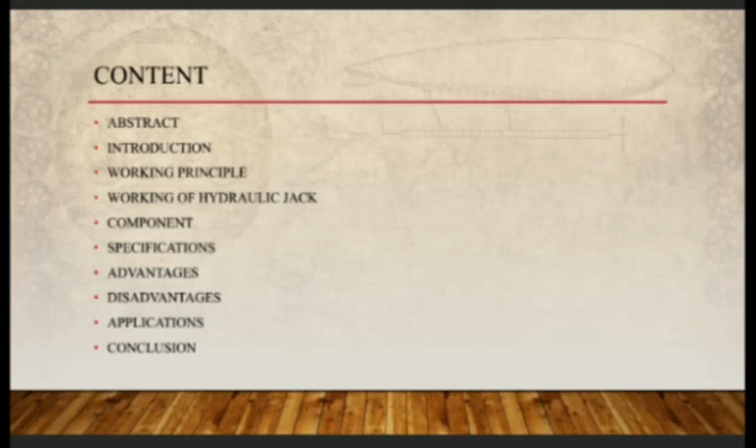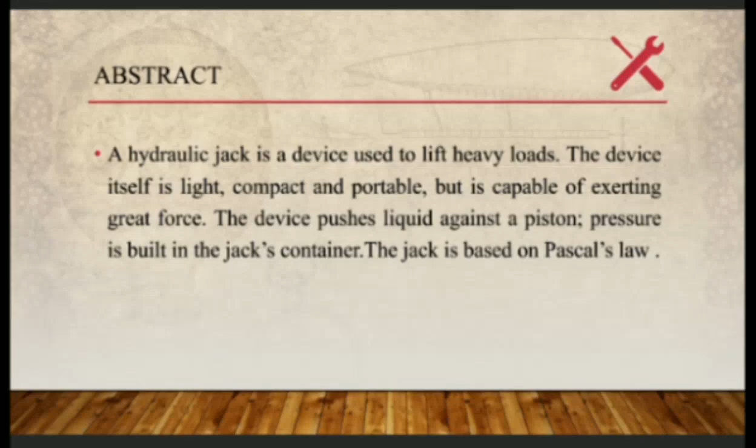Now let us take a look at the abstract. A hydraulic jack is a device used to lift heavy loads. The device itself is light, compact, and portable. This device works on the principle of Pascal's law. The device pushes liquid against a piston, and pressure is built in the jack container, where the pressure is the same throughout.

Introduction to hydraulic jack: a hydraulic jack is a jack that uses a liquid to push against a piston, based on Pascal's law. Pascal's law states that the pressure in a closed container is the same at all points. If two cylinders are connected, applying force to the smaller cylinder results in the same amount of pressure in the larger cylinder. Since the larger cylinder has more area, the resulting force will be greater, but the pressure will be the same. In other words, an increase in area leads to an increase in force. The greater the difference in size between the two cylinders, the greater the increase in force will be.

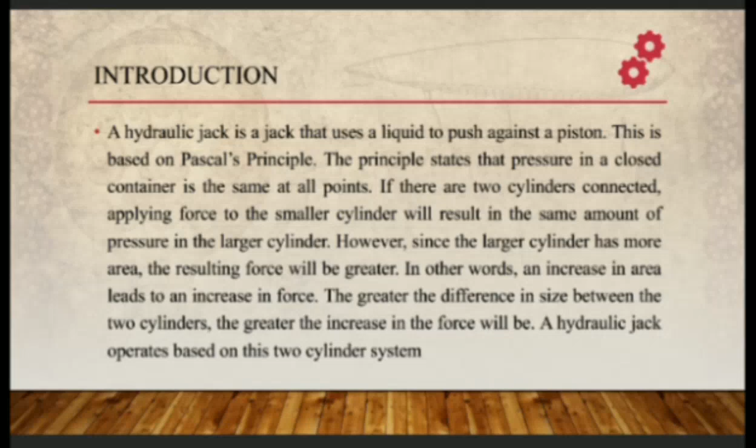A hydraulic jack operates based on this two-cylinder system.

Let's move forward to the basic working principle of the hydraulic jack. The wrench moves upward to drive the small piston upward to lift the weight. The oil pressure produced manually is squeezed into the large piston according to Pascal's principle. The area ratio of the bigger piston to the smaller piston is the same as that of the pressure.

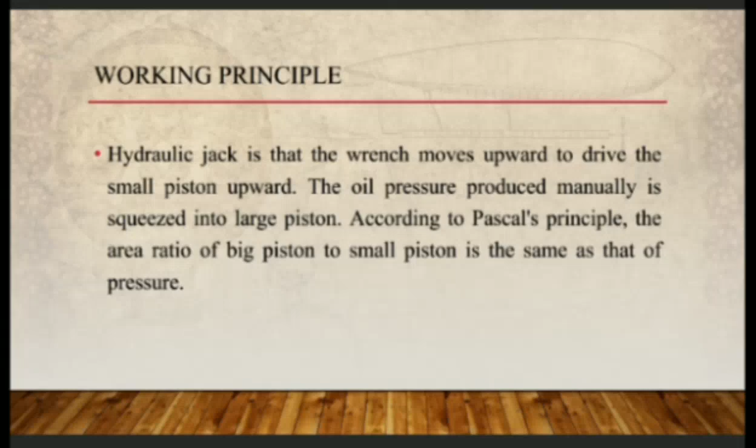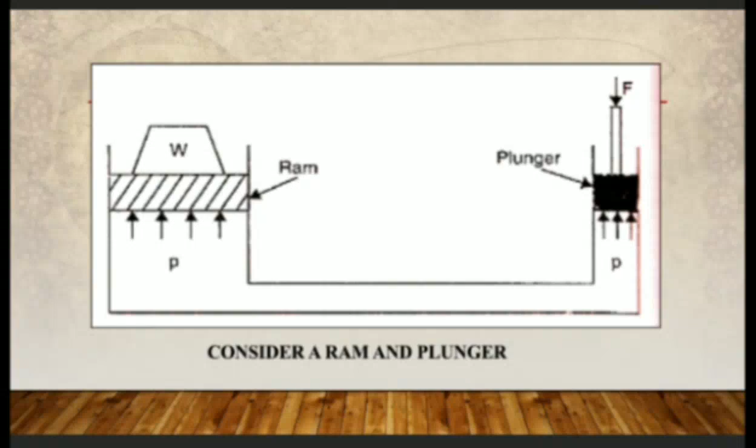Let us move forward. If two cylinders are connected by an incompressible fluid and a given amount of pressure is applied to one cylinder, that same pressure is imparted to the second cylinder through the fluid connecting them. Because pressure equals force per unit area, the cylinder with the larger area will experience a greater force effect. Even though the pressure on both cylinders is the same, the force produced on the larger cylinder will be proportionally higher based on its area.

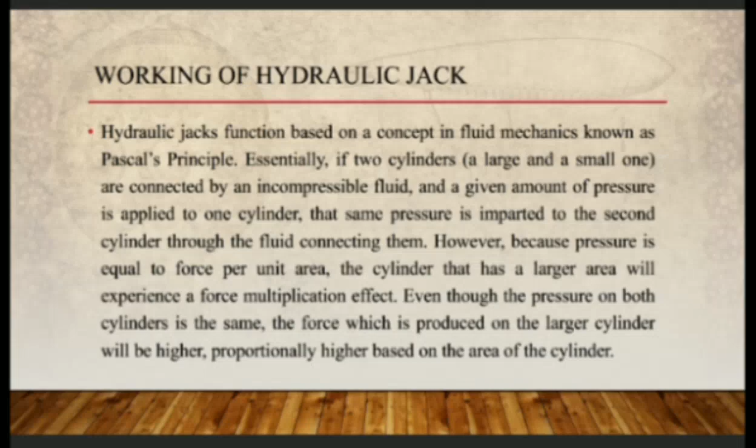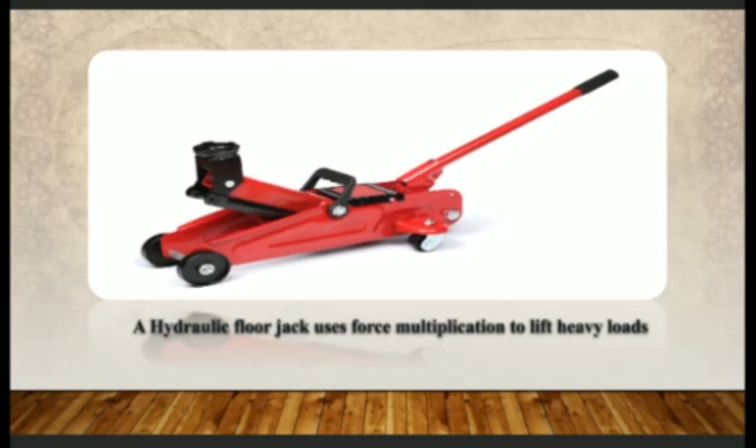In this picture, we can see the hydraulic jack basically which is used in garages, service centers, and many other areas, used for force multiplication to lift heavy loads. It is also portable, so it can be carried in the car.

Let us take a look at the components of the hydraulic jack: reservoir, or buffer tank; pump with piston or plunger ram; lever or handle; check valve; release valve; main cylinder or ram; and handle.

The purpose of the check valve is to stop the flow of fluid in one direction while allowing free flow in the opposite direction. It is also called the non-return valve. The release valve releases the pressure to allow the ram piston to retract. The handle is used to lift the weight on the plunger or ram, and the reservoir holds the hydraulic fluid.

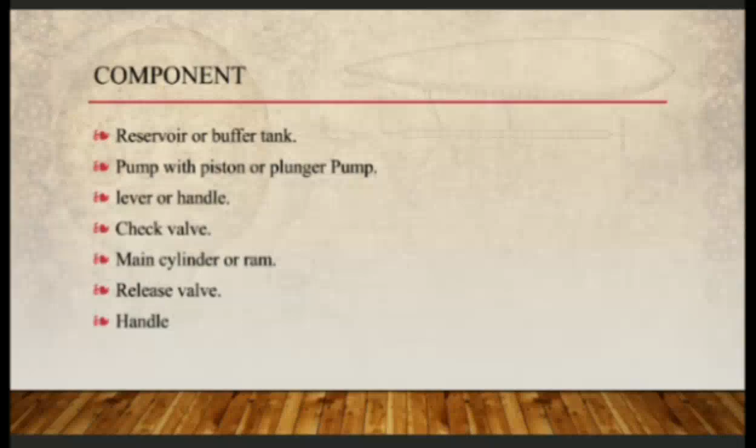Now let us see the specifications of the hydraulic jack. Capacity is the lifting load capability, usually expressed in tons or pounds. Maximum lift height is the reference surface lift pad when the jack is in the fully extended position. Travel length is the maximum distance over which the ram will travel from its unextended position to its fully extended position.

Working orientation, based on the design of the unit, may be vertical or horizontal. Handle length is the overall length of the handle for raising and lowering the jack, which is the main part of the hydraulic jack. Power source can be manual, air or pneumatic, battery, or electric, for example.

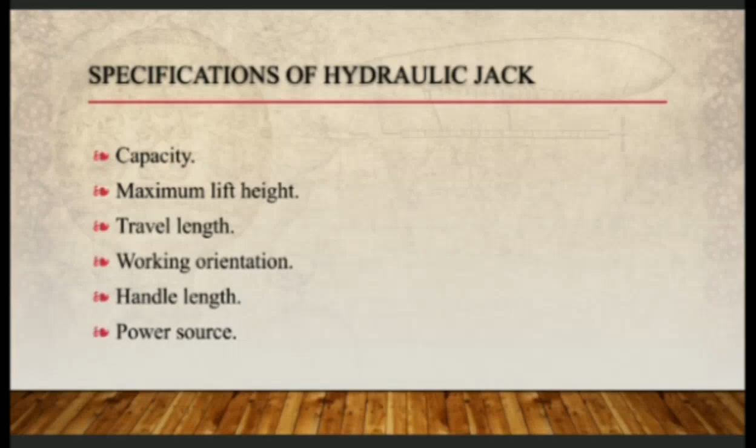Now let us see the advantages of the hydraulic jack: safety first, easier inspection, no scaffolding required, faster erection, tank erection top-downwards, reducing construction time and cost considerably.

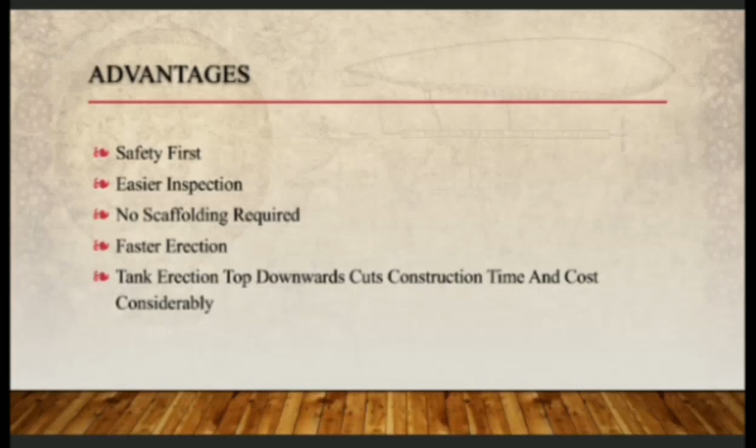Now let us take a look at the disadvantages. It is susceptible to failure if the oil seals are worn out, which can cause serious problems. It has a relatively slow speed. Hydraulic oil can emit an unpleasant odor when it becomes too warm due to overuse, and it can overheat very quickly. Lastly, a hydraulic oil leak can cause soil and water pollution.

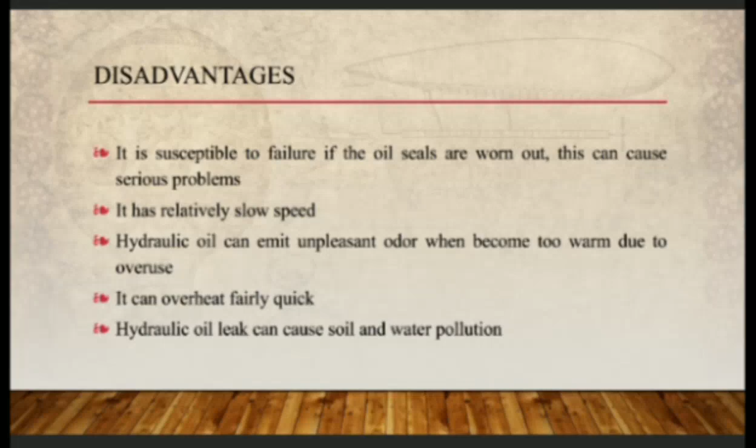Now let us take a look at the applications of the hydraulic jack: dismantling of old tanks, repair to tank foundation, building of field erected storage tanks, repair or replacement of tank bottom plates, increasing tank capacity by adding shell rings or courses, and erection of other circular structures such as reactor shields in nuclear power plants, etc.

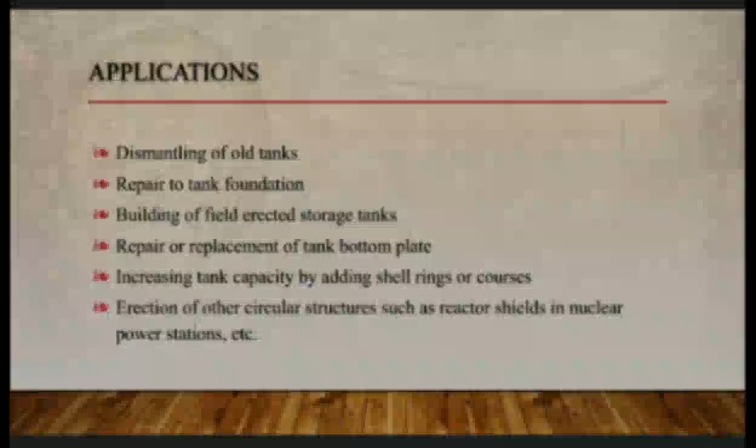It is also used in aircraft and automotive applications, such as for transmission and engine testing, as well as general industrial use, tractors, and trailers.

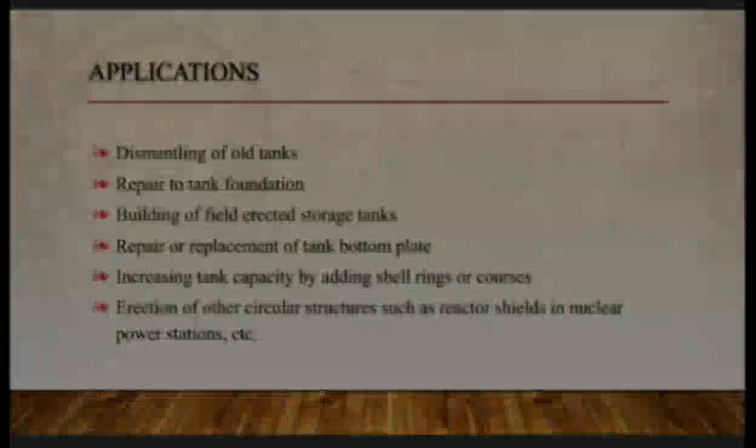Now let us see the conclusion of the hydraulic jack. A hydraulic jack is a device used to carry large loads with the application of a small force. Maintenance service of a vehicle can be easily done with this project. The inbuilt jack is operated by a battery, so it can be used even when the vehicle engine is not started. This arrangement is very useful for heavy load vehicles, and a single person can go on a long drive.